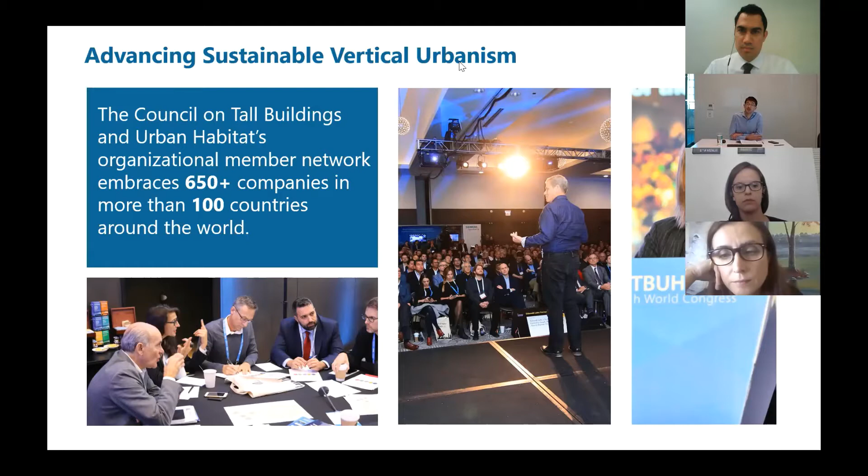Next, Rafaela Sanchez. Rafaela's PhD research involves numerical and experimental investigation on intermodular connections for better understanding and modeling of seismic behavior of modular steel buildings. Rafaela earned her bachelor's degree in civil engineering in 2007 and worked as a project manager and bidder for 6 years in a steel structure manufacturer in Brazil. In 2015, she earned her master's degree in civil engineering from the Federal University of Rio de Janeiro and started her PhD program in structural engineering at the University of Toronto. Now I leave the floor to Amir and Rafaela, but please hold your questions until the end. Thank you.

Thank you, Daniel. And hi, everyone. My name is Amir Fatih. And as Daniel mentioned, I'm a structural engineer at Dialog, working with a great team on different projects from industrial to residential, high rises and low rises. I joined Professor Mercan's team in 2010 at the University of Toronto to continue my postgraduate studies in structural dynamics and earthquake engineering.

During my master's, as you might guess, my research was mostly focused on the dynamic analysis of modular steel buildings. Unfortunately, at that time, there weren't many researchers or resources on the dynamic behavior of modular buildings, except maybe a few technical papers and a few limited studies on seismic behavior of low-rise modular buildings. So we started our investigation on modular steel buildings, or MSBs, in 2010, and I will briefly mention some of the topics to you later today.

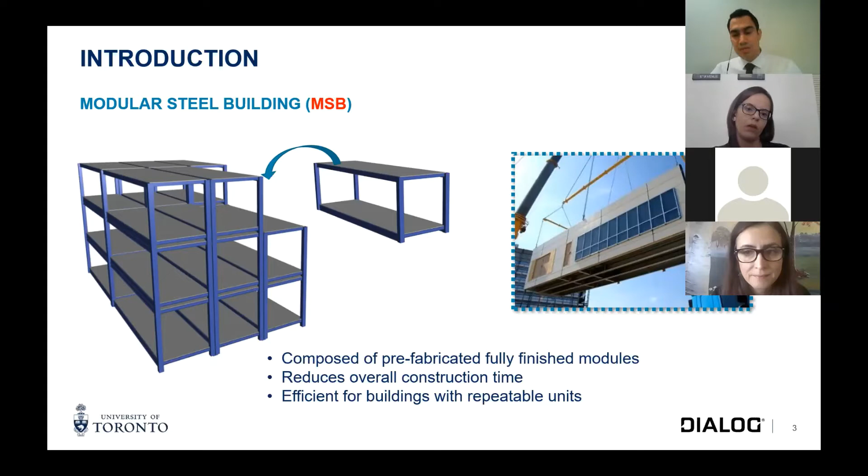Also, there is another project, the new Marriott Hotel in Manhattan, New York, which is currently under construction. This is a $65 million project with 168 rooms, 26 stories in height, and it's located at 842 6th Avenue, which will be one of the world's tallest modular hotels. In this project, each steel module contains one fully outfitted guest room, which is pre-painted, decorated, outfitted with beds, bedding, flooring, and even toiletries. The hotel's roof and rooftop bar are also constructed using modular construction.

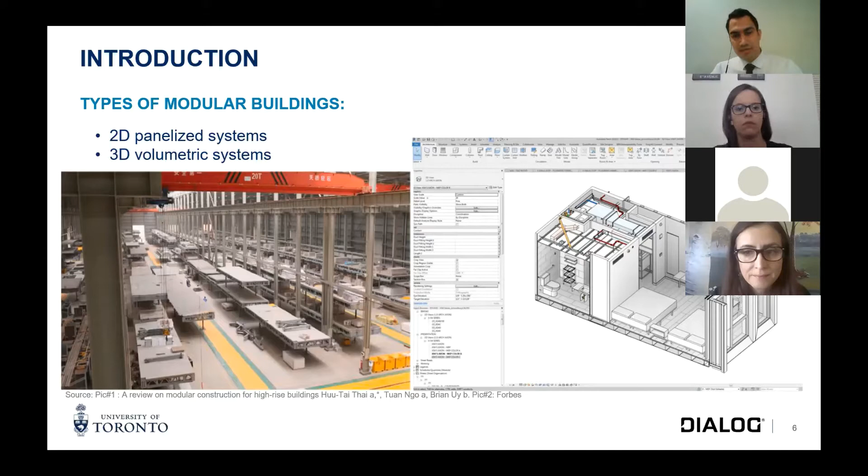Now, by having these prefabricated formations, we would get a relatively different structural system in terms of how the forces and loads are being transferred throughout the building in both vertical and horizontal directions. In terms of load transfer mechanisms, for gravity, modular buildings are generally classified as either a load-bearing wall system, as shown on the photo on the left, or a corner supported frame, as shown on the photo on the right.

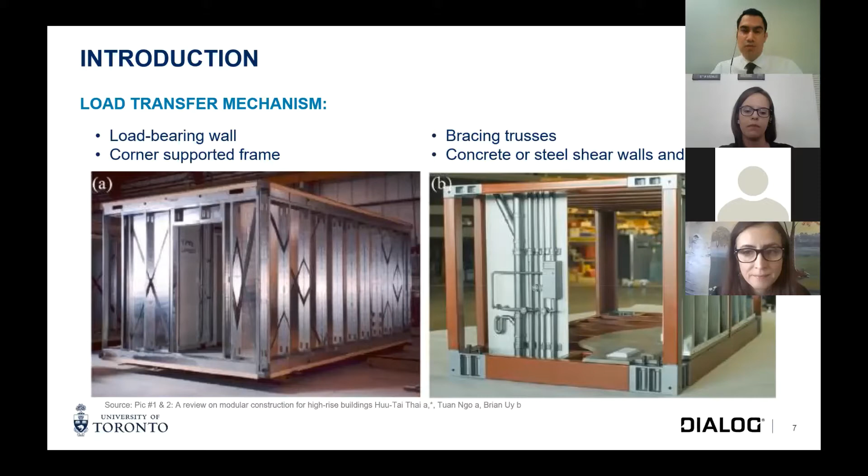And as for the lateral load resisting system or seismic force resisting system, we have either steel bracings or concrete or steel shear walls and core, which is pretty much similar to what we have for regular buildings. Now, to transfer these lateral and vertical loads between the modules, we need to add and design an additional intermediate element in between the floors and ceilings and in between the modules in the horizontal direction. And these connections were one of the things that we looked at in our previous studies.

In those studies, we looked at the structural details, connections, and individual elements, as well as the overall nonlinear behavior of the modular steel building. In terms of details, we used OpenSees, which is an open source earthquake engineering simulation software. We looked at the relative displacement and rotations between the modules. Because unlike conventional buildings, there's no single uniform diaphragm at each level, and we have multiple rigid diaphragms that are connected together per level.

We've also investigated the way that the forces are transferred through the columns and horizontal connections where the modules are connected to each other, and we studied the additional concentration of inelasticity at those joints. And in another study, we used 3D pushover analysis and 3D incremental dynamic analysis, or IDA, to better understand the overall nonlinear dynamic behavior and characteristics of the modular buildings.

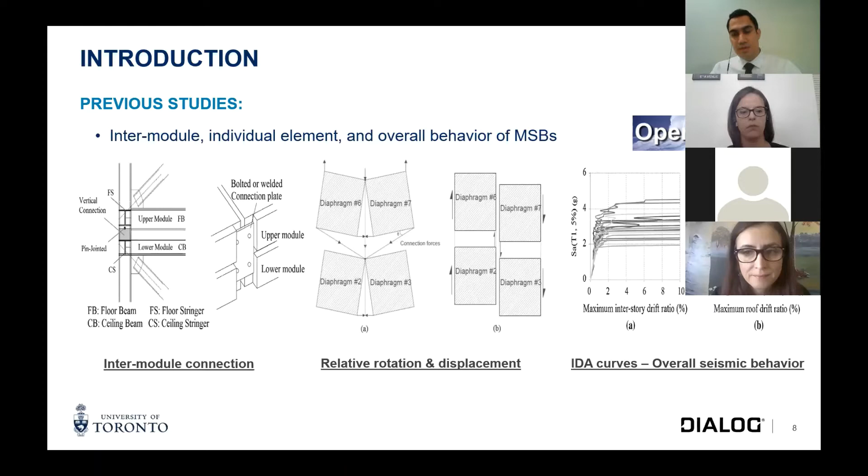In our current study, we moved a few steps further and investigated the other code-related properties of modular steel buildings and the dynamic behavior of high-rise modular buildings that my friend and colleague Rafaela will explain to you shortly.

I'm just gonna stop sharing here so she can share a screen. Hello, everyone. I'm Rafaela here. So let me just share my screen. Where is it? I think it's this one. Let's share. So I hope you can all see my screen now.

I'm a civil engineer, as Daniel said, and I joined Professor Mercan's research group in 2015 when I started my PhD program, which I intend to finish this fall. And I've been working on modular construction, in particular modular steel buildings, since mid-2017, continuing previous work done by other graduate students from our research group, such as Amir's work. My thesis is focused on a new type of connection for modular steel buildings.

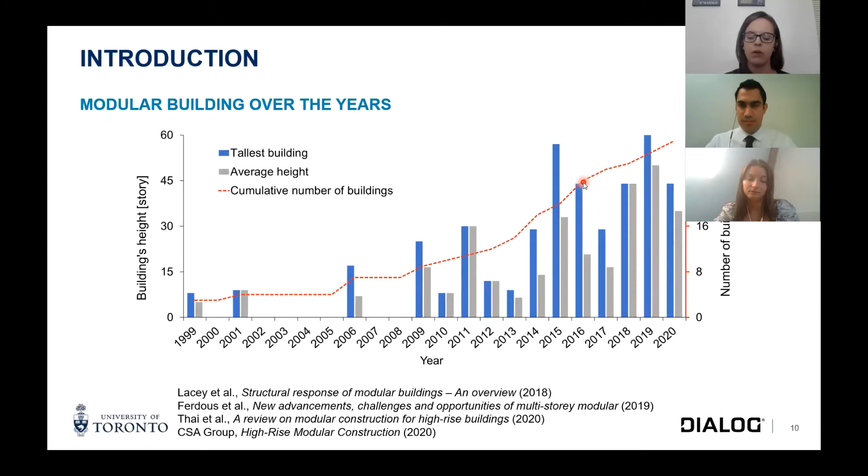So with that in mind, Dialog and UofT created this partnership to investigate, by a numerical study, the seismic behavior of low to high-rise modular steel buildings, or MSBs, under different hazard levels. For that purpose, we selected 3 building prototypes: a 6-story, 12-story, and a 32-story MSB. So we have a low, a mid, and a high-rise.

And we performed nonlinear static analysis, or pushover, and also bidirectional nonlinear time history analysis. So this means that we have 3D models, and we are applying ground acceleration in both orthogonal directions simultaneously. And the main parameters of interest are the overstrength and ductility seismic design factors, which are determined in the design code.

And we wanted to investigate if these design factors change as we change the building's height, because this was pointed out by other authors, and we wanted to see if that's the same for modular buildings. We wanted to take a look at the maximum interstory drift and how it's associated with structural damage. Of course, in the paper, we have a lot more results, but for this presentation, I selected these as I think these are the most important ones.

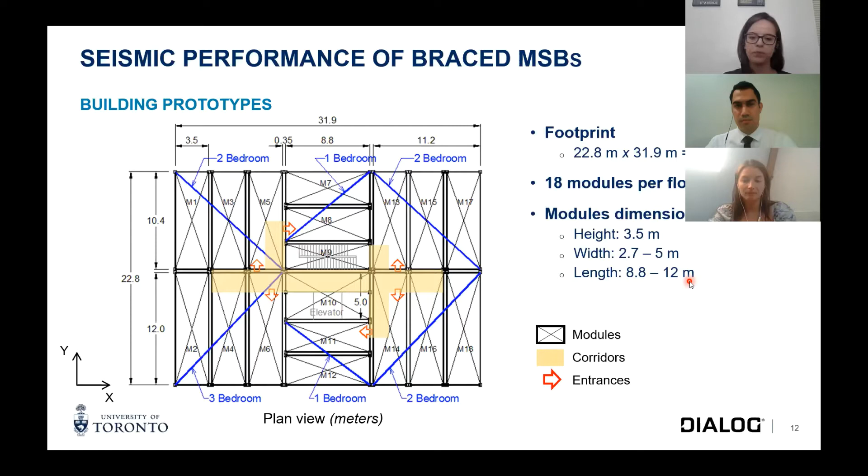So with that plan view, we define our seismic force resisting system, which is a purely braced system, and we define the location of these braces based on the corridors and to avoid doors and windows. We designed the building for moderate ductility according to the Canadian code and following the capacity design strategy, where the braces are expected to experience the inelastic deformation and the other structural elements such as columns and beams are going to be preserved.

So here we can see the location of the braces for all three buildings. The black X is the X brace, and the black chevron symbol is the chevron brace. So for the 6-story, we have chevron braces in these locations here, and X braces here, here, and here. But when we change to the 12-story, we realized that these X braces would increase the load in the columns too much. So for the 12-story and also the 32-story, we changed to all chevron braces to save a little bit in the columns.

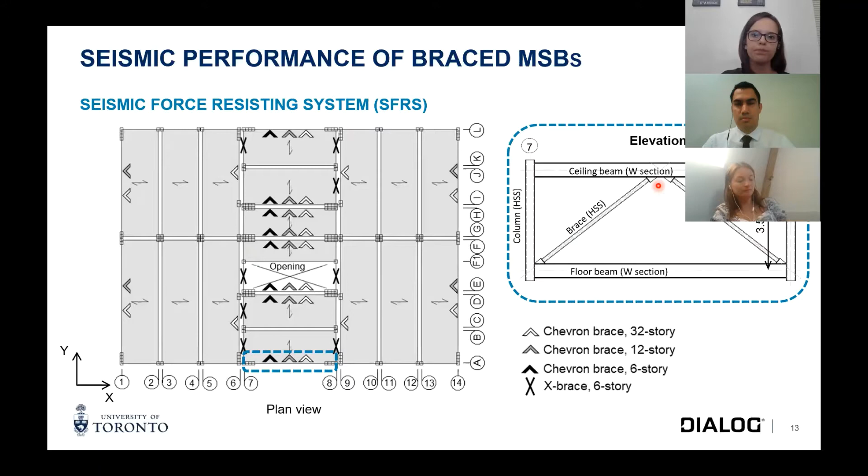So that was the plan view, and these are some elevations just to illustrate this distribution of the braces. So as I said, for the 6 story in the Y direction, we had X braces, right? And these are the heights of the buildings in meters. And for the 12 story and for the 32 story, we have all chevron braces. And this is in X direction, this here is in the Y direction.

And for the 32, I'm just showing the X direction because the Y direction is very similar to what we did in the 12 story. So it looks pretty much like this as well. But here we can see that in the first stories, we have an increased number of columns, as I explained before. So all these 3 buildings we modeled in ETABS Ultimate.

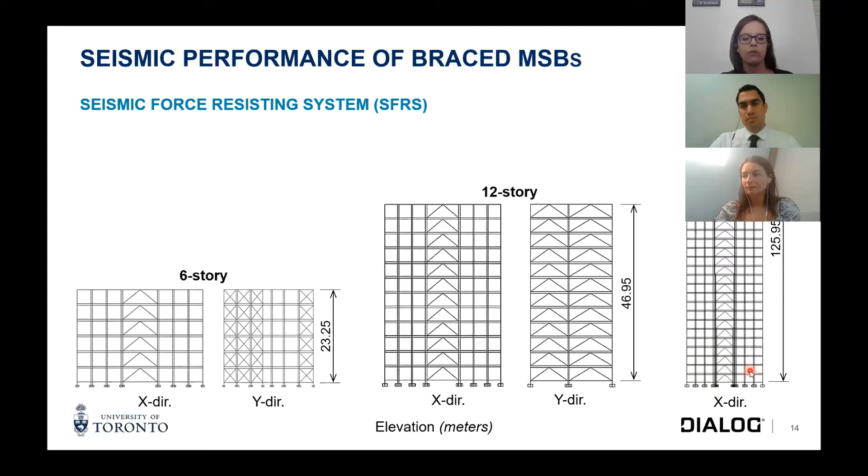And now we're gonna discuss a little bit how we model these. So this is a schematic representation of the model. We considered frame elements for all structural members, for braces, beams, columns, everything's frame elements. We also consider individual diaphragms for all the slabs, ceiling and floor.

Here on the left, we have a representation of what will be 2 modules on top of each other. So this will be the upper module, this will be the lower module. And we consider lumped plasticity. So in the middle of the brace, we assigned an automatic hinge, which is a feature in ETABS that is defined based on ASCE 41-17. And for the brace, it will be an axial hinge, which is shown here.

On the right side is a representation of how the force displacement relationship of this axial hinge would look like. So, for example, these green dots are the yielding capacity of the brace in tension and buckling of the brace in compression. These blue dots are the ultimate capacity. The pink dot is the residual strength, and the red dot indicates failure of that element, the brace.

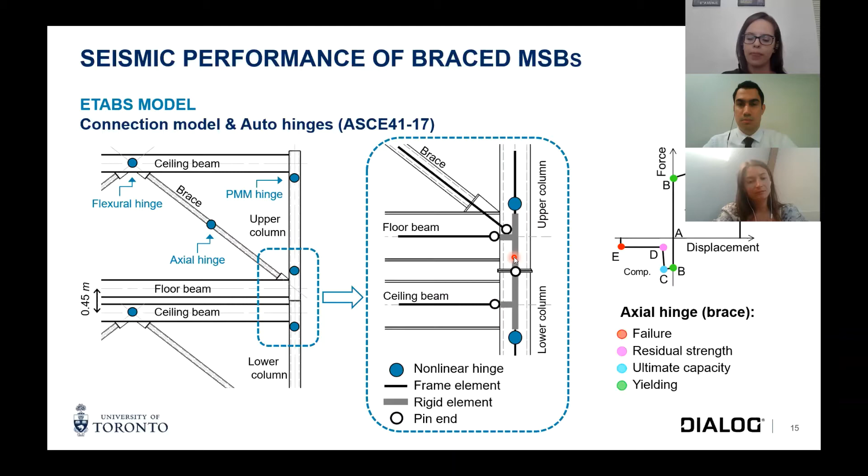So now about the analysis that we conducted. As I said, we did pushover, nonlinear static, and nonlinear dynamic. So for the nonlinear static and also modal analysis, we did a 3D modal analysis, and we also had to run what we call the 2D modal analysis, even though the model is still a 3D model, but we conducted the modal analysis in the X direction and also in the Y direction.

So we could find the first period in the X direction, which we're calling here T1X, and the first period in the Y direction, which we call here T1Y. So these three parameters are important for the ground motion scaling procedure, which I'm going to discuss in the next slide.

And so for the pushover, we also did the pushover in the X direction and Y direction separately. So we could use the pushover curves to estimate what's the ductility and what's the overstrength of our buildings. So we use the displacement distribution according to the first mode shape, obviously in X and Y direction. And we obtain the pushover curve.

And with this curve, we can find what's the max roof displacement and what's the yield displacement, which is associated with the first hinge formation. And the ratio between the max displacement and the yield displacement is what we call the ductility factor, or RD. And in the same way, we can find what's the max base shear and what's the design base shear. And the ratio between these two is what we call in here the overstrength factor, or RO.

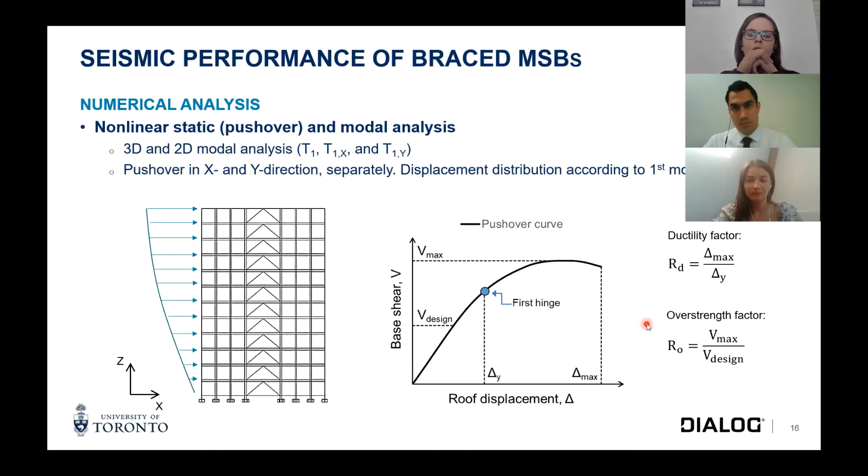So now for the nonlinear time history analysis. So we did, as I mentioned before, a bidirectional nonlinear time history analysis. This means that we selected 12 pairs of ground motion. So we have a two-component ground acceleration. One component we apply in the x direction, the other component we apply in the y direction simultaneously, right? And then we get the response of the building.

So we selected 12 of these pairs, and we scale them to different hazard levels following FEMA P58 procedure. And we selected the 3 hazard levels. Actually, in the paper we have 4, but here I'm going to talk about only these 3 because I think they are the main ones for Vancouver. So we scale to FE, which is frequent earthquake hazard level, DBE, which is design base earthquake, and MCE, which is maximum credible earthquake. So the intensity increases from FE to MCE.

And here on the right, we have what will be the spectral acceleration for the city of Vancouver. And the red line will be for the MCE target, the blue solid line, the DBE, and the FE target is the green line here. Each one of these gray lines is one ground motion spectrum.

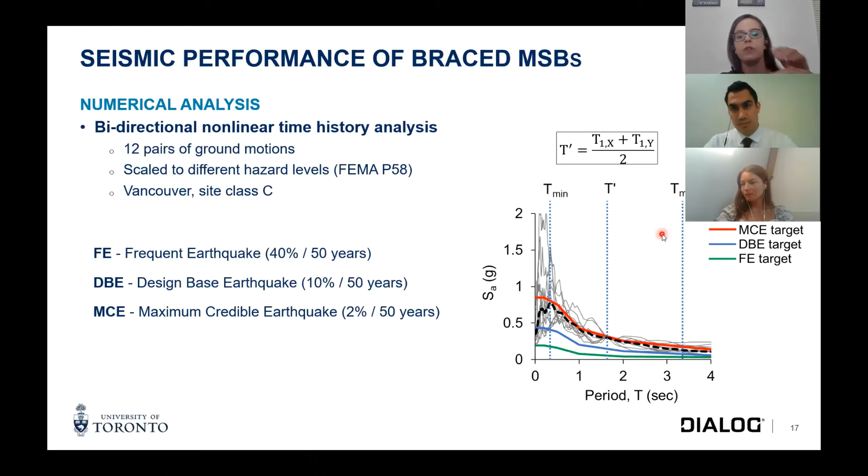Other than this, still about the nonlinear time history analysis, we ran a direct integration method. We considered P-delta and large displacements, and we assigned 3% damping ratio using Rayleigh damping. But we also managed to reduce the total duration of the analysis by reducing the duration of the ground motion using the strong motion interval. And we did that by using Arias intensity.

So Arias intensity is defined by this integral here, which is the integral of the time acceleration. And it's defined as the interval that accumulates between 5 and 95% of the accelerogram's total energy. And this is when the structural damage is expected to happen, right? And by doing that, in our case, we selected 5% and 98% just to be on the safe side.

And with that, we were able to reduce the total duration of all the ground motions that we ran. And so on average, we reduced the duration of the ground motions by 50%, which allowed us to run a large number of analyses with reasonable computational resources.

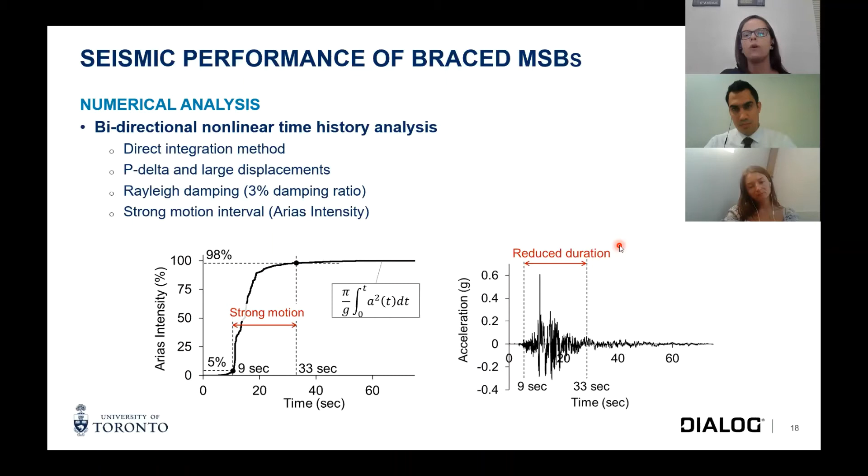So to finish the numerical analysis part, for each pair of ground accelerations, we run the time history analysis, and one of the parameters that we were interested in was the interstory drifts, in particular max interstory drift, which is commonly used to establish the severity of the ground motion. And FEMA 356 determines 3 damage states for braced steel buildings that associate interstory drift, or ISD, with structural damage.

So in FEMA, we have the damage states called immediate occupancy, or IO, and its limit is 0.5% interstory drift, and is associated with minor yielding or buckling in braces. We also have life safety damage state, or LS, and the limit is 1.5% interstory drift. It's associated with many braces yielding and buckling, so it's a more severe damage. And we also have the collapse prevention damage state, which is limited by 2% interstory drift, and it's associated with extensive yielding, buckling of braces, and failure.

So this is what we selected for analysis. Just to summarize the whole story up until now, we have 3 buildings, 6, 12, and 32 story modular braced steel buildings. We ran nonlinear static analysis or pushover and bidirectional nonlinear time history analysis with 12 ground motions scaled to 3 different hazard levels. And we're going to analyze mostly interstory drifts and ductility and overstrength factors.

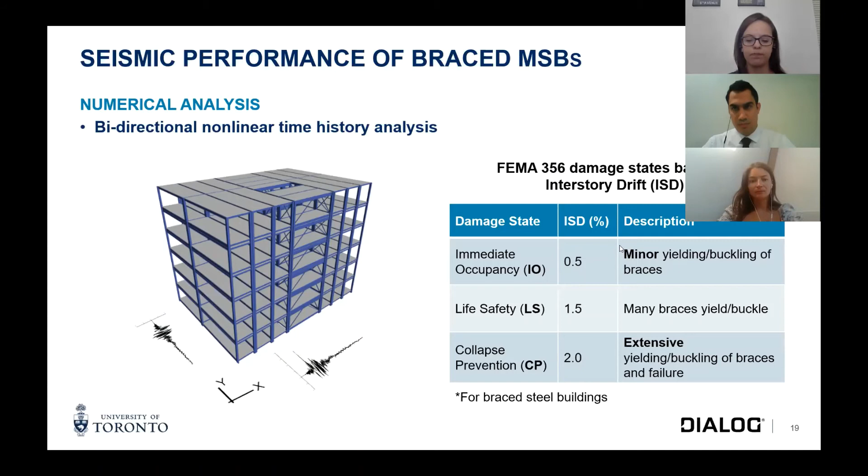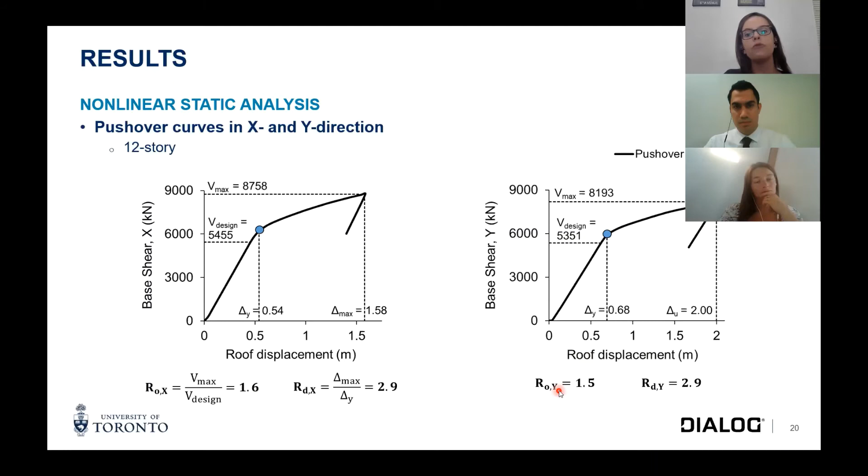And if we do that for all 3 buildings, we can summarize this in this graph. So here on the left, we have the overstrength factor per building. So we have the 6-story, the 12-story, and the 32-story. The blue bar is the X direction, and the orange bar is the Y direction.

Let me just sip some water here.

And similarly, on the right side, we have the ductility factor per building. So again, we have the 6, 12 and 32-story buildings. The blue bar is the X direction. The orange bar is the Y direction.

What we were expecting to see here, and what we did see, was the reduction in the overstrength factor as we increase the height of the building. And the same thing happened with the ductility factor. As we increase the height of the building, we saw a tendency of decreasing these 2 seismic design factors. This was observed also in other studies, and we observed the same thing in our study here.

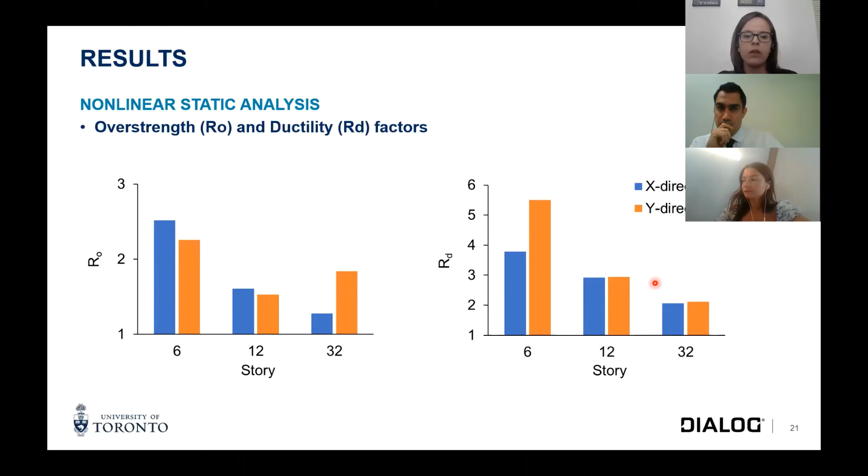Now, moving to results of the nonlinear time history analysis. One of the results that we can evaluate here is the distribution of interstory drifts throughout the height and how much they vary, the record-to-record variability. So for example, here on the left is the max interstory drift per floor, first, second, third, and so on up until the 12th floor. Here in the X direction, here in the Y direction, for ground motions scaled to the FE hazard level, which is the less intense hazard level.

Each one of these gray lines is one ground motion. So we see that depending on the ground motion, the response of the building changes quite a lot. That's why it's important to calculate the average, which is the thick black line here in the middle. And similarly in the Y direction. And this dashed line here is the IO limit state, the immediate occupancy limit state defined by FEMA.

And on the right side, you have the same idea, but these are the results obtained for the MCE hazard level. One thing we can observe is an increase in the variability of the response if you compare MCE and FE, in both directions. And obviously, we have a considerable increase in the interstory drift. So while under the FE hazard level the interstory drifts are below IO, when we go to the MCE hazard level, the drifts start to get closer to the collapse prevention limit state, which is expected.

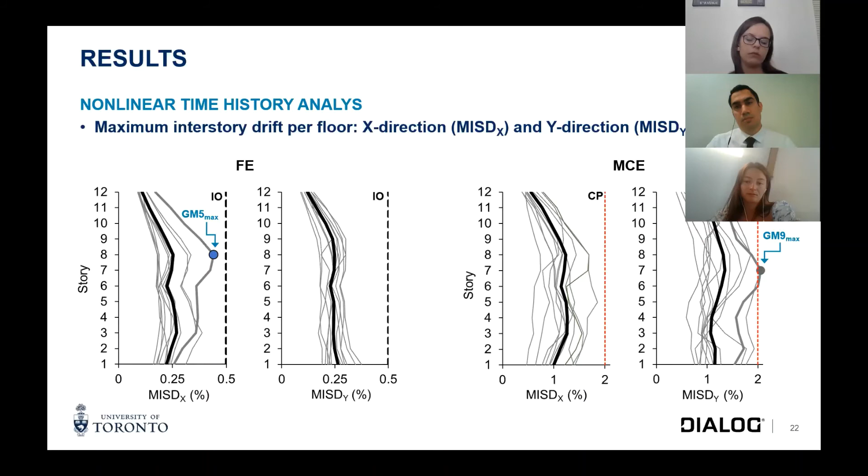So if we take the max response per ground motion, per building, per hazard level, we can summarize this whole story with these 3 graphs here. Again, the dashed red line is the collapse prevention limit state, the dash-dot line is life safety, and the dashed black line is the immediate occupancy limit state.

Each one of these dots is the max interstory drift obtained for this particular building under a specific hazard level. For example, the blue is the FE hazard level, so for ground motion 1 scaled to the FE hazard level, this was the max interstory drift. The orange is for DBE and the gray is for MCE.

So we did that for all 3 buildings. One thing that we can see here is that, as expected, as we increase the intensity of the ground motion, the response in terms of drift tends to increase, right? This happens for all of them. And also, as we increase the height of the building, so we change from 6 to 12 and then to 32, we see that the max interstory drift tends to get closer to collapse prevention and exceed collapse prevention for the 32-story case, for example, right?

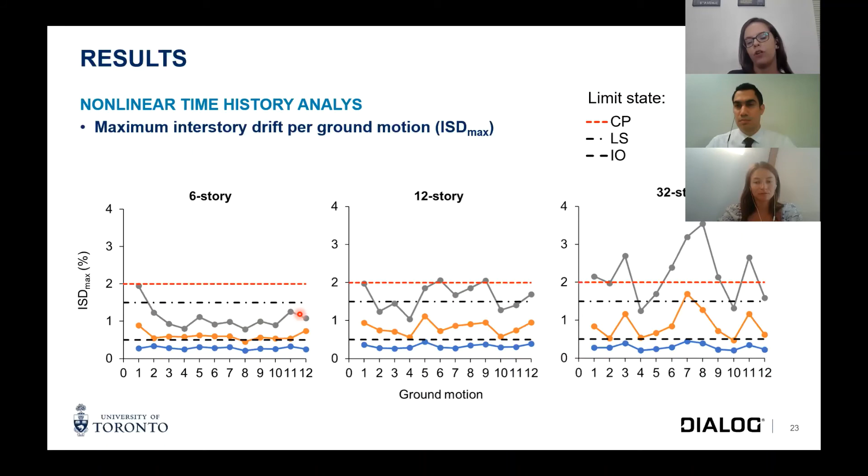So another way of evaluating this is that, let's say that I'll pick all these dots here, and then I'll calculate the average of the max interstory drift, right? And then I'll do that for each hazard level and for each building. And so when we do that, we have this super summarized graph, which shows the average max interstory drift here per hazard level. So the blue bar is FE, DBE is the orange bar, and MCE is the gray bar, and also per building, right?

So when we do that, we can see that the 6-story building, which is our low-rise modular building, has a quite acceptable performance. Under MCE hazard level, the average of the max interstory drift is still below life safety damage state, which is associated with a lot of braces yielding and buckling, right? When we go to the 12-story, we see that the average max ISD exceeds life safety damage state.

And one other thing that we can see from this graph here is that all 3 buildings have a comparable performance when they are subjected to FE hazard level, frequent earthquake, which is the less intense one. So all of them have the average max ISD below IO. But this difference in performance starts to get more pronounced as we increase the intensity of the ground motion.

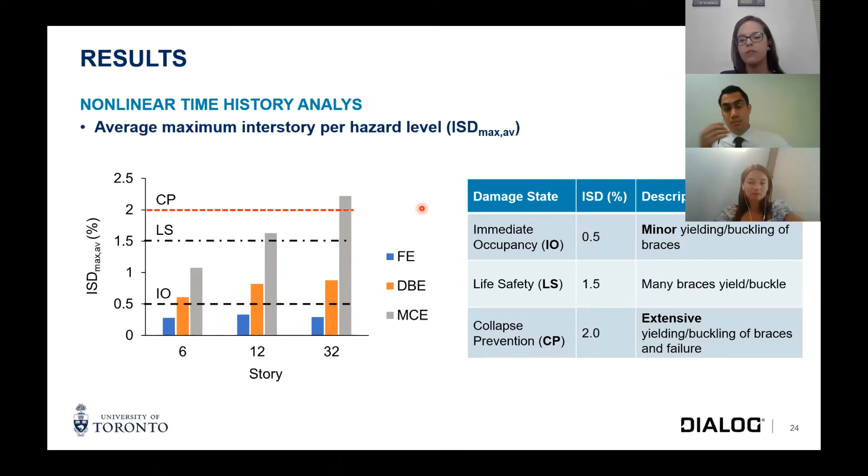But to help us visualize these damage states and how they are associated with the structural damage, I've selected a few images generated by ETABS, where we can see those green dots, blue dots that show yielding, buckling, ultimate strength, and so on. And I've selected the output from the ground motion that led to higher response. So this is for the 6-story under ground motion number 1, which was the one that led to higher response, just so the difference in structural damage is more pronounced and we can see it better.

So this is the structural damage at the end of the dynamic analysis. This one is ground motion 1, as I said, scaled to FE hazard level. So we can see that there are some braces here that start yielding or buckling. Some braces don't even see anything. And we have some here going to the residual strength range. And as we increase the intensity, as is expected, the severity of the damage also increases.

So for a DBE hazard level, we see that several of the braces are in the residual strength range, and some of them are already failing. And for MCE hazard level, we have a considerable amount of braces failing, and few of them are still in the residual strength, right? But still, all the damage is limited to the braces, which is what we were expecting to see.

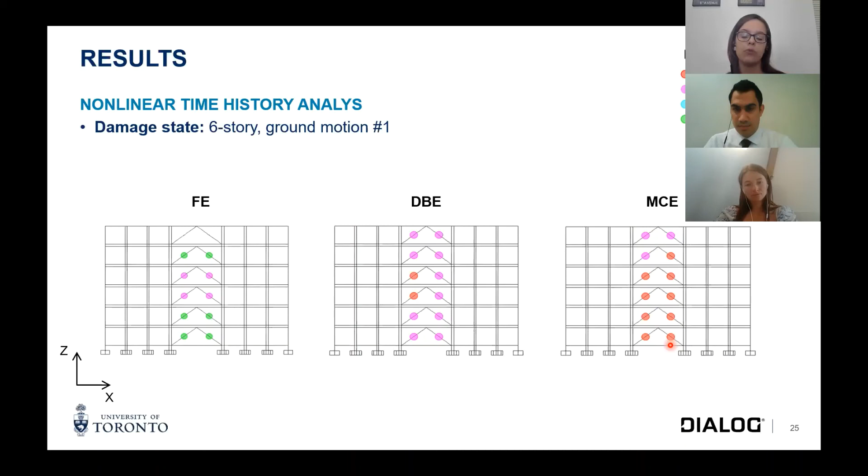So for the 12-story building, I selected ground motion number 9. And the idea here is the same. First, here's ground motion 9 scaled to FE hazard level. And we can see that we have several braces yielding, some of them not at all. We have some more in the residual strength limit. And as we increase the intensity of the ground motion, we see more severe damage.

So for the DBE, we have pretty much all of the braces in the residual strength stage. And when we go to the MCE level, we see that even though the plastic hinges are mostly restricted to the braces, we still saw a plastic hinge forming here in the column, right?

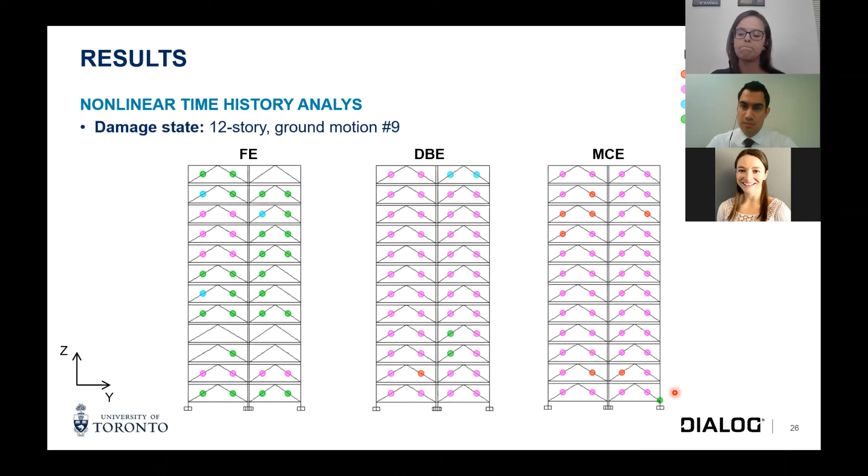And last but not least, we have the damage state of the 32-story building. For this one, I selected ground motion number 8.

And so as I was saying before, all 3 buildings for FE hazard level, they have more or less the same behavior. So we see some braces yielding, some of them not seeing anything at all, some of them in the residual strength. So for FE and DBE hazard levels, they have more or less comparable performance, right? But when we go to MCE hazard level, then the story is a bit different.

So this suggests that we still have a lot of work to do when it comes to high-rise modular steel buildings. We still have to investigate this more and try to propose different approaches to improve this behavior, so we can continue to build tall modular buildings all over the world.

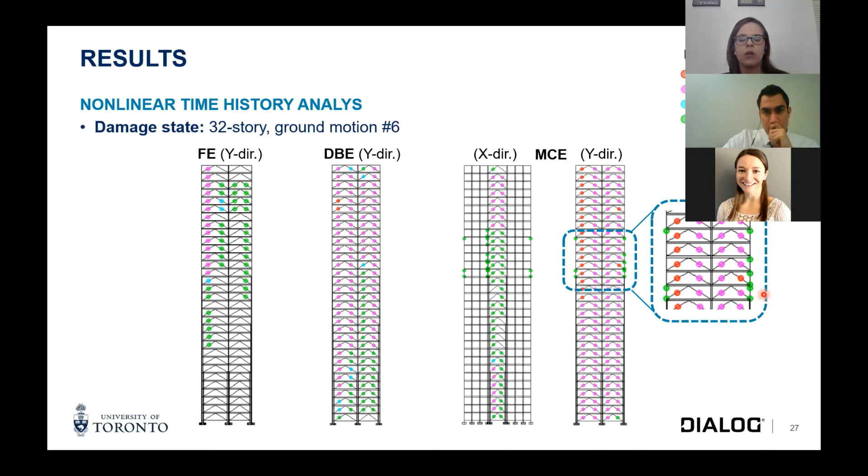So to conclude, I selected here a few topics that I judged to be more important. So we saw that both our ductility seismic design factor and overstrength factor tend to decrease with increasing building height. And in the code, these two factors are selected based on the type of the seismic force resisting system, not exactly on the height of it, even though there are some limitations there, but still mainly based on the type of the system, right?

I'm not saying that the code is wrong. I'm just saying that there are a few studies that are showing this tendency. And we also saw this in our modular buildings. Another thing that we saw is that the structural damage in low and mid-rise MSBs, meaning the 6 and the 12-story, tends to be limited to the braces, even though for the 12-story we did see some column hinging there, but as an overall tendency, it's usually limited to the braces.

Now, for high-rise modular buildings, we saw a tendency for column hinging under severe earthquakes, and this tendency is much more pronounced. And we also saw that the building may exceed the collapse prevention limit state under MCE hazard level. Of course, this study is not the final one, right? We have to continue working on and improving it.